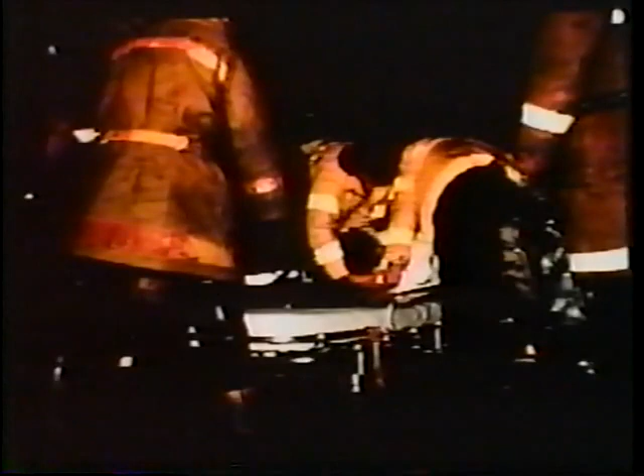Excavation is one of the most hazardous types of work done in the construction industry. Excavation accidents occur frequently and tend to be more serious than construction accidents in general.

The primary type of accident of concern in excavation-related work is a cave-in. The actual number of cave-in accidents is not large when compared to the total number of accidents occurring in all of construction. However, those that do occur tend to be of a very serious nature.

The National Institute of Occupational Safety and Health, NIOSH, conducts research on various safety and health problems, provides technical assistance to OSHA, and recommends standards for OSHA's adoption.

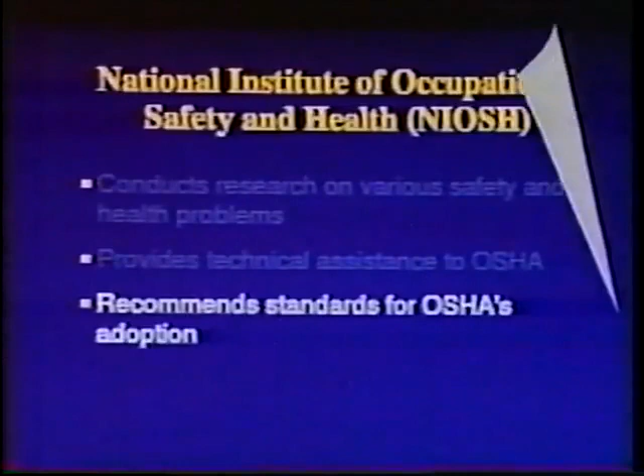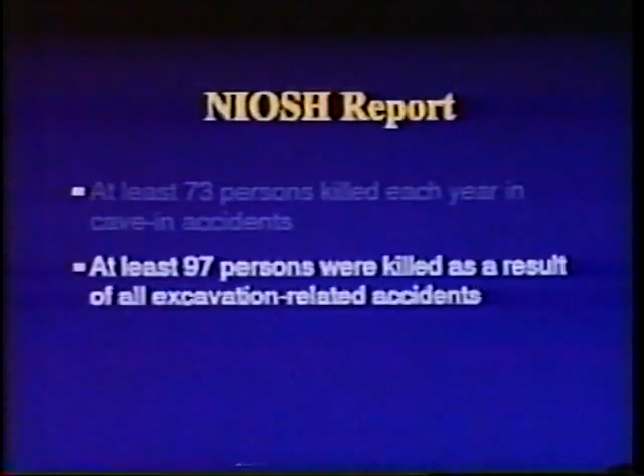In a recent report prepared by NIOSH based on OSHA's inspection data, it was estimated that at least 73 persons were killed each year in cave-in accidents, and at least 97 persons were killed as a result of all excavation-related accidents.

This program presents an overview of OSHA's requirements for protection of employees in excavations.

OSHA's excavation standard is contained in its Code of Federal Regulations for the Construction Industry, 29 CFR, Part 1926. The standards found in Subpart P consist of 3 sections.

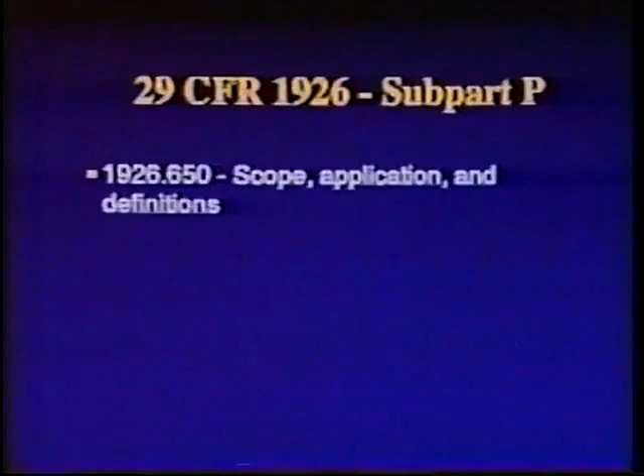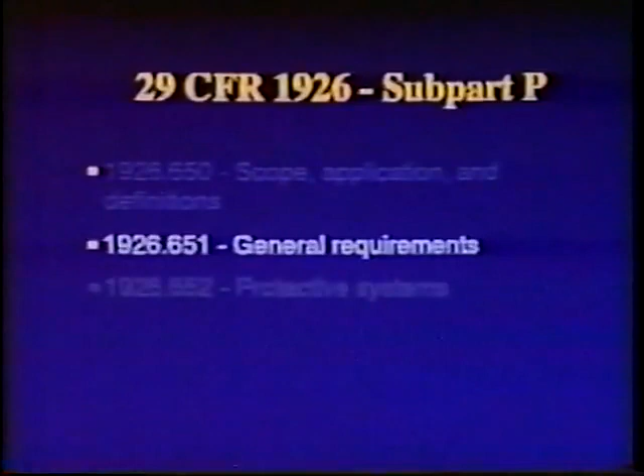Section 1926-650 contains the scope, application, and definitions applicable to Subpart P. Section 1926-651 contains general requirements, and Section 1926-652 contains requirements for protective systems.

There are also 6 appendices, A through F.

OSHA's excavation standard defines excavations to include trenches. The standard states that, in general, the depth of a trench is greater than the width, but the width of the trench, measured at the bottom, is not greater than 15 feet.

OSHA Standard 29 CFR 1926-651 contains requirements for the protection of employees against several different types of hazards of excavation-related work. Let's look at some of these.

All surface encumbrances, such as trees or boulders, that are located so as to create a hazard must be removed or supported to safeguard workers.

The estimated location of utility installations such as sewer, water, fuel, and electric lines, or any other underground installations that may reasonably be met with during excavation work, are to be determined prior to opening the ground.

Prior to start of actual operations, the utility companies or owners are to be advised of the proposed work and asked to establish the underground installation's actual location.

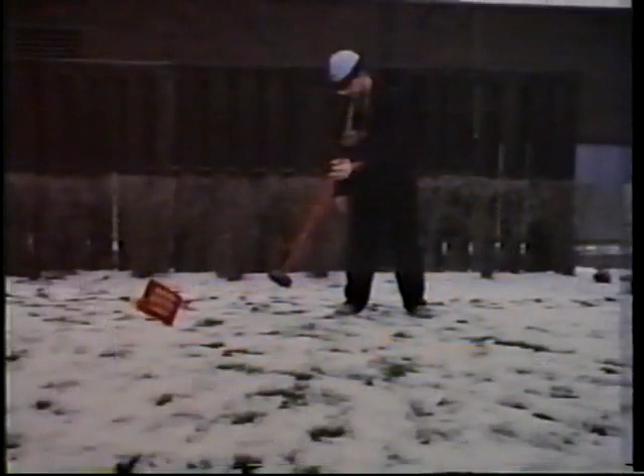When the utility or owner cannot establish exact locations or respond in a timely manner, the contractor may proceed with caution. Detection equipment or other acceptable means to locate utility installations must be used.

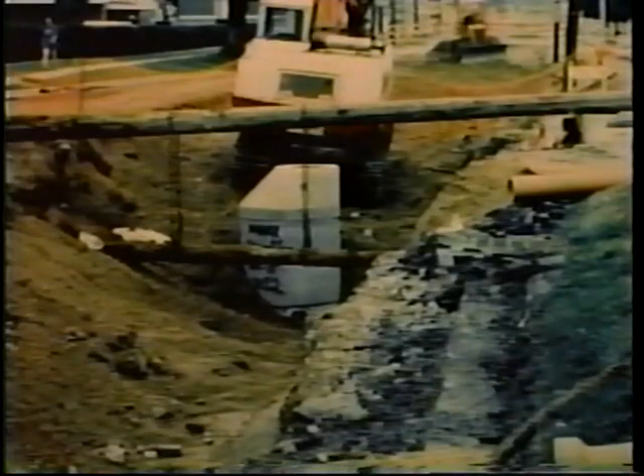When excavation work nears the estimated location of the installations, the exact location is to be found by safe and acceptable means. While the excavation is open, underground installations must be protected, supported, or removed as necessary to safeguard employees.

Flooding, shock, asphyxiation, electrocution, fire, explosion, and collapse of undermined installations are some of the hazards that result when underground installations are damaged.

Structural ramps must be designed and constructed to meet the requirements of their usage.

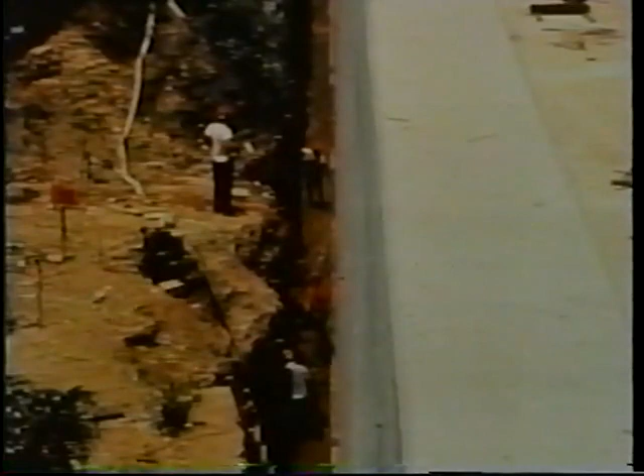Safe means of entering and leaving excavations must be provided for workers. A stairway, ladder, ramp, or other safe means of egress must be located in trench excavations 4 feet or more in depth so as to require no more than 25 feet of lateral travel.

This is to allow workers to get out quickly in the event of an emergency.

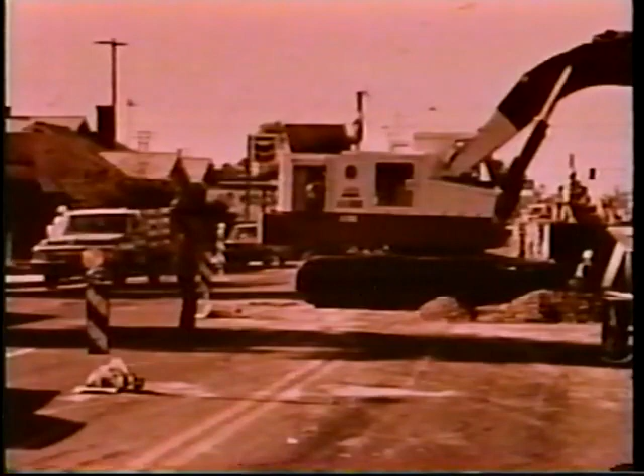Employees exposed to public vehicular traffic shall be provided with and must wear warning vests or other suitable garments marked with or made of reflectorized or high visibility material.

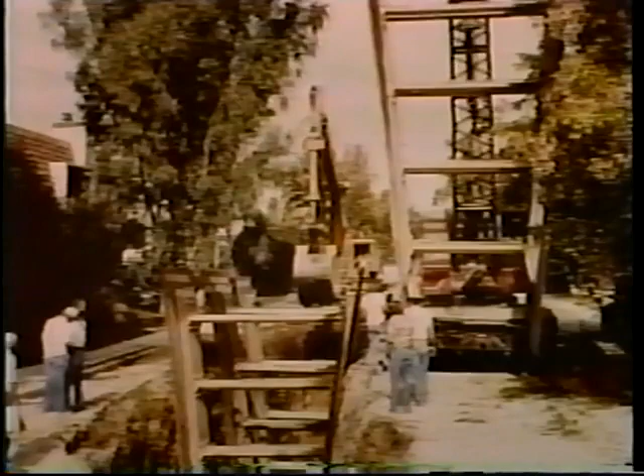Employees are not allowed under loads handled by lifting or digging equipment. Employees must stand away from vehicles being loaded or unloaded to avoid being struck by spillage or falling materials.

Operators may remain in the cabs of vehicles being loaded or unloaded when the vehicles are equipped to provide adequate protection for the operator during these operations.

When mobile equipment is operated next to an excavation or when it must approach the edge of an excavation and the operator does not have a clear, direct view of the edge, a warning system must be used. This system may involve barricades, stop logs, or signals.

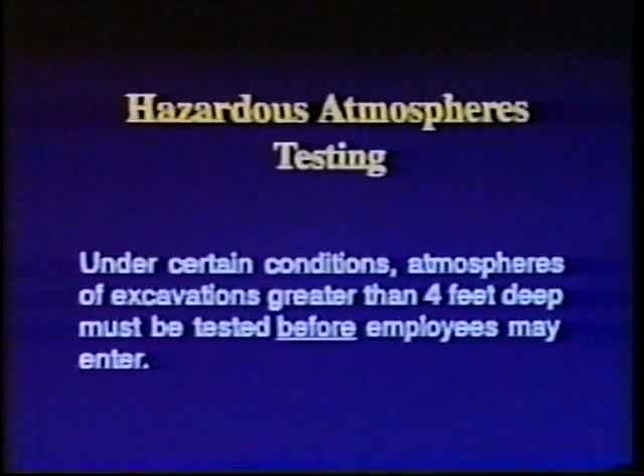To prevent exposure to harmful levels of air contaminants and to assure acceptable atmospheric conditions, certain requirements must be met. Under certain conditions, atmospheres of excavations greater than 4 feet deep must be tested before employees may enter.

Testing is required where oxygen deficiency, that is less than 19.5% oxygen, or a hazardous atmosphere exists or could reasonably be expected to exist.

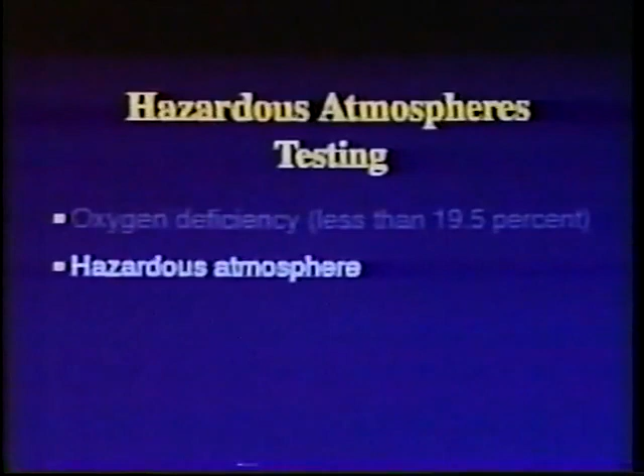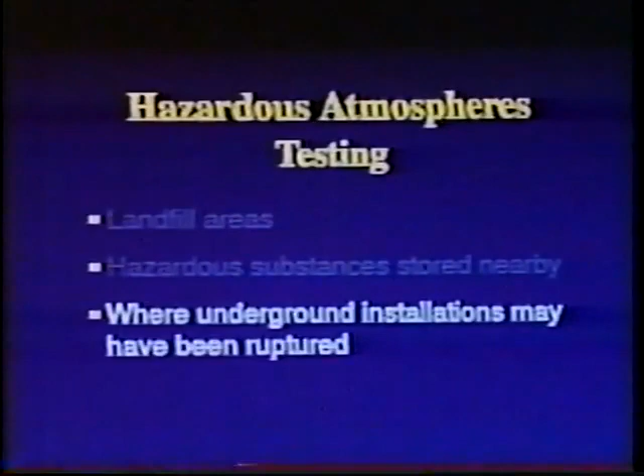Examples of these conditions include excavations in landfill areas or where hazardous substances are stored nearby, or where underground installations may have been ruptured. Adequate precautions shall be taken to prevent employee exposure to atmospheres containing less than 19.5% oxygen and other hazardous atmospheres.

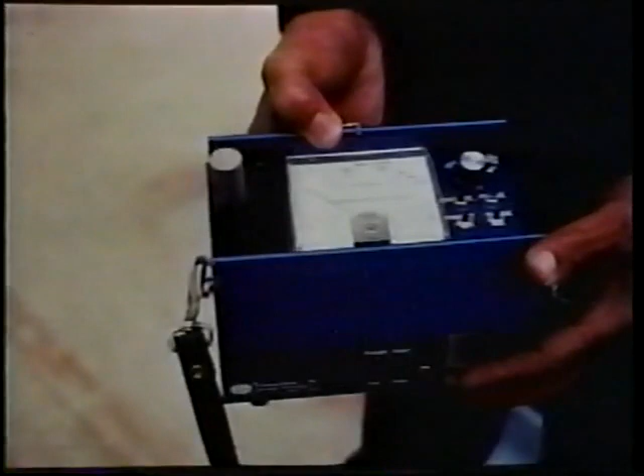These precautions include providing proper respiratory protection or ventilation. When controls such as ventilation are used to reduce the level of atmospheric contaminants to an acceptable level, testing is to be conducted as often as necessary to ensure continuing safety.

Emergency rescue equipment such as breathing apparatus, a safety harness and line, or a basket stretcher must be readily available where hazardous atmospheric conditions exist or can reasonably be expected to develop. This equipment must be attended when in use.

Employees entering deep and confined footing excavations are to wear a harness with a securely attached lifeline. The lifeline is to be separate from any line used to handle materials and is to be individually attended at all times while the employee wearing the lifeline is in the excavation.

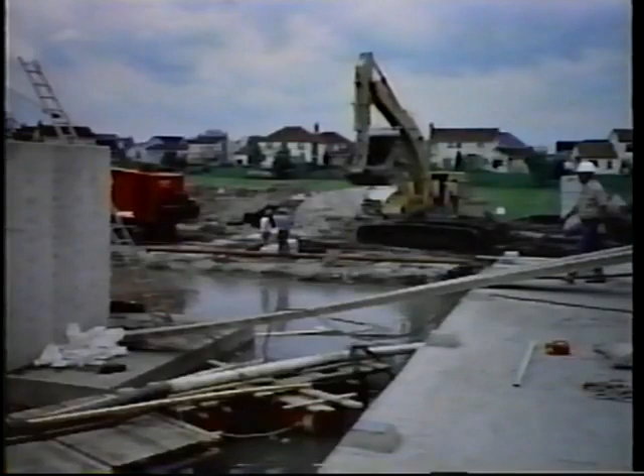Water is very likely to be present during the course of work in many excavations and is one of the major concerns during excavation operations. The action of water against the sides of excavations can cause undermining and cave-ins. The presence of accumulated water in or around excavations must, therefore, be treated with caution.

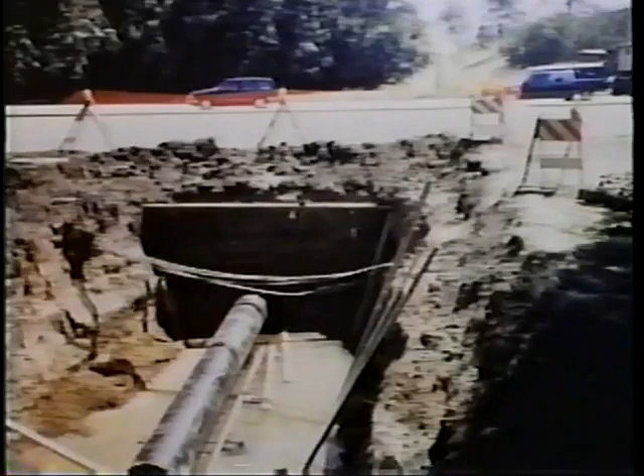Employees shall not be permitted to work in excavations where water has accumulated or is accumulating unless adequate precautions have been taken to protect them. Necessary precautions vary with each situation but could include special support or shield systems or water removal.

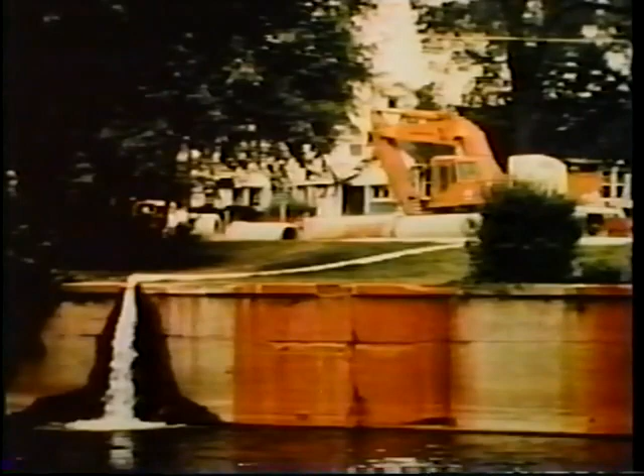If water removal equipment is used, the equipment and its operation must be monitored by a competent person to assure continued proper operation. If excavation work interrupts the natural drainage of surface water, diversion ditches, dikes, or other means must be used to prevent surface water from entering the excavation and to provide safe drainage of the adjacent area.

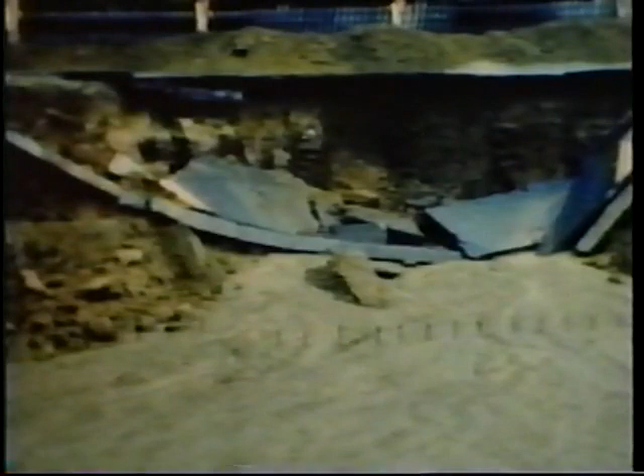Workers may also face hazards where the stability of adjacent buildings, walls, or other structures is endangered by excavation operations. Support systems such as shoring, bracing, or underpinning must be provided to ensure the stability of such structures for the protection of employees. Excavation below the level of the base or footing of any foundation or retaining wall that could be reasonably expected to pose a hazard to employees is not permitted,

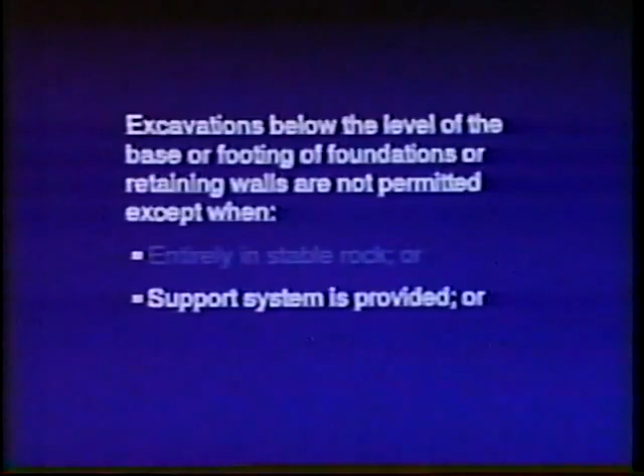except when the excavation is entirely in stable rock, or a support system such as underpinning is provided to ensure employee safety and stability of the structure, or a registered professional engineer, PE, has approved a determination that the structure is far enough away not to be affected by excavation activity, or that such excavation work will not pose a hazard to employees.

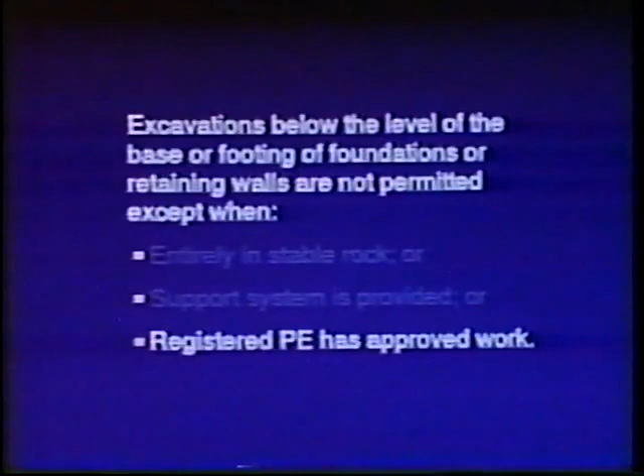Sidewalks, pavements, and appurtenant structure may not be undermined unless a support system or another method of protection is provided to protect employees from possible collapse.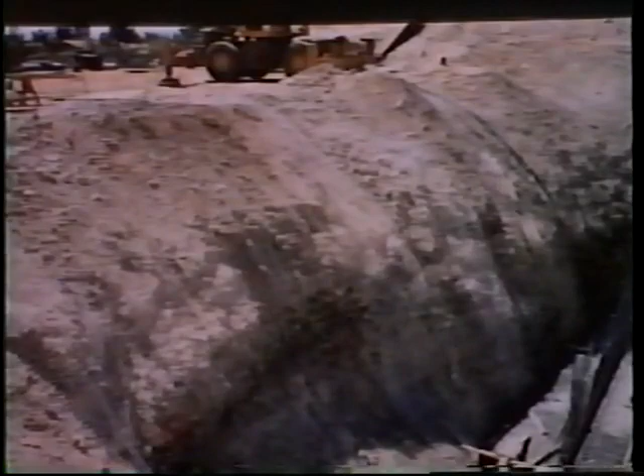Employees must be protected from loose rock or soil which might create a hazard by falling or rolling from the excavation face. Materials and/or machines may become hazardous if measures aren't taken to keep them from sliding or falling into an excavation where employees are working.

Protection of employees from materials or equipment which could fall or roll into an excavation shall be provided by keeping them at least 2 feet from the edge of excavations, or by the use of adequate retaining devices, or by a combination of both if necessary.

Daily inspections of excavations, the adjacent areas, and protective systems must be made by a competent person for evidence of a situation that could result in possible cave-ins, failure of protective systems, hazardous atmospheres, or other hazardous conditions.

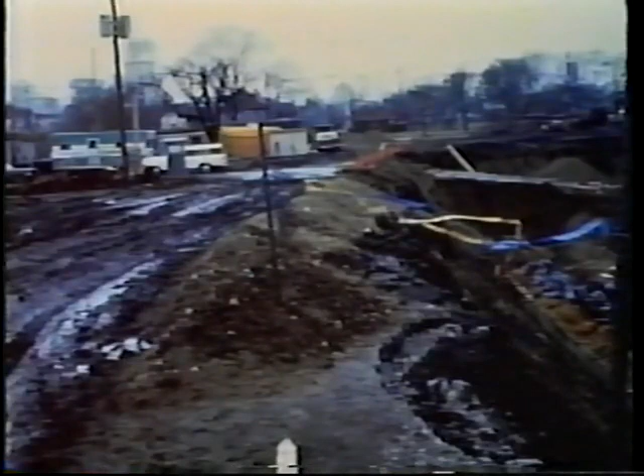Excavations subject to heavy rain runoff are to be inspected by a competent person and, as necessary, precautions instituted to protect against the hazard. Inspection shall be made after every rainstorm or other hazard-increasing occurrence.

The competent person shall make inspections prior to the start of work and as needed throughout the shift, as well as after every rainstorm or other hazard-increasing occurrence. These inspections are only required when employee exposure can be reasonably anticipated.

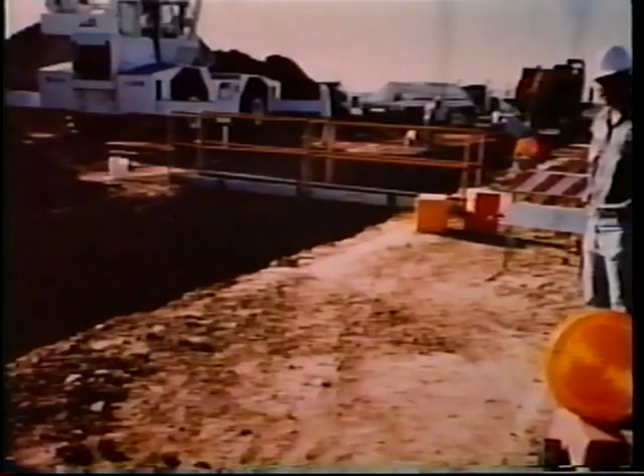Where employees or equipment are required or permitted to cross over excavations, walkways or bridges with standard guardrails must be provided.

Excavation safety requires pre-planning. Let's take a look at some other areas where anticipation of possible hazards can help avoid accidents and injuries. OSHA Standard 29 CFR 1926.652 contains requirements for the protection of employees from cave-ins through the use of protective systems.

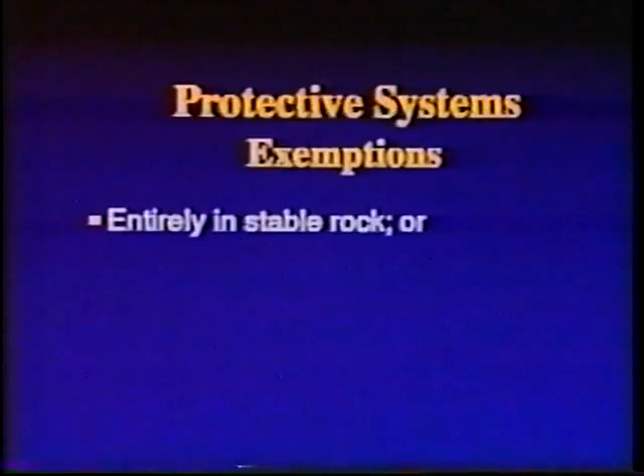OSHA requires that each employee in an excavation be protected from cave-ins by a protective system, except when excavations are made entirely in stable rock, or excavations are less than 5 feet in depth and determined by a competent person to show no indication of potential cave-in.

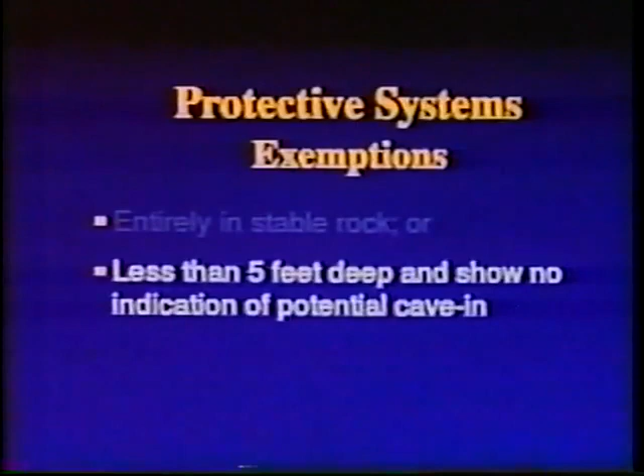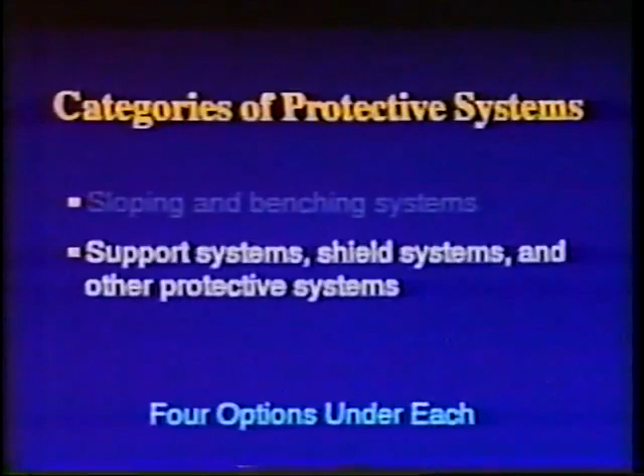OSHA divides protective systems into two categories: sloping and benching systems, and support systems, shield systems, and other protective systems. The use of either of these categories of protective systems requires the choice of one of 4 design options.

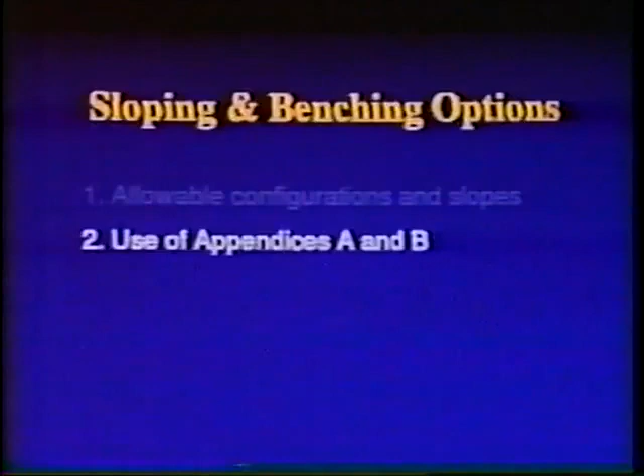Let's first look at the allowable options when choosing sloping and benching systems. The options include allowable configurations and slopes, the use of Appendices A and B, designs using other tabulated data, and designed by a registered professional engineer.

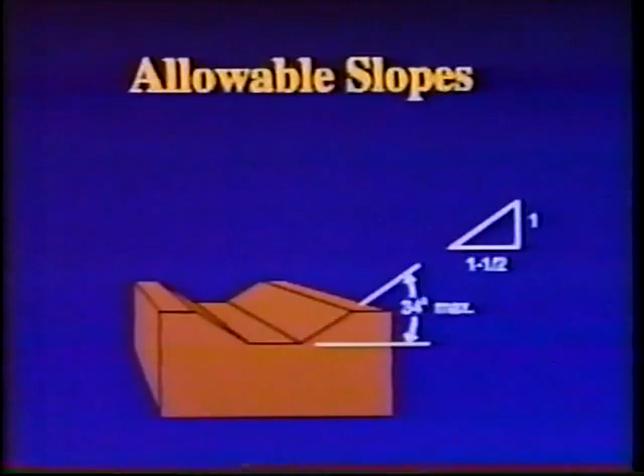The first option specifies allowable configurations and slopes. Any excavation less than 20 feet in depth may be sloped at an angle not steeper than 1 1/2 horizontal to 1 vertical, 34 degrees measured from the horizontal. Such slopes meet OSHA's requirements for worst-case soils, Type C, as defined in 29 CFR 1926, Subpart P, Appendix A.

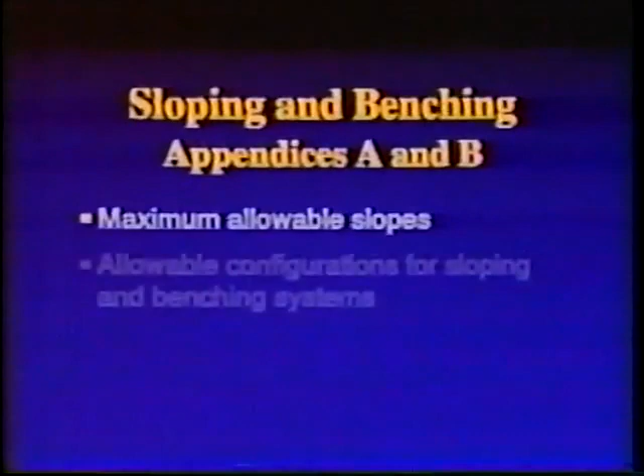The second option involves the use of Appendices A and B. Maximum allowable slopes and allowable configurations for sloping and benching systems are set forth in Appendices A and B.

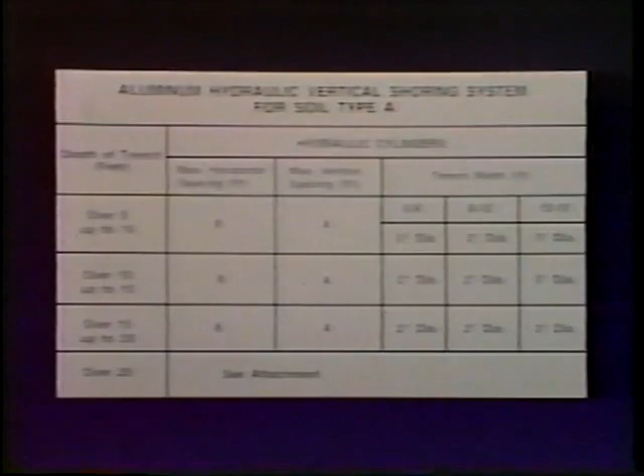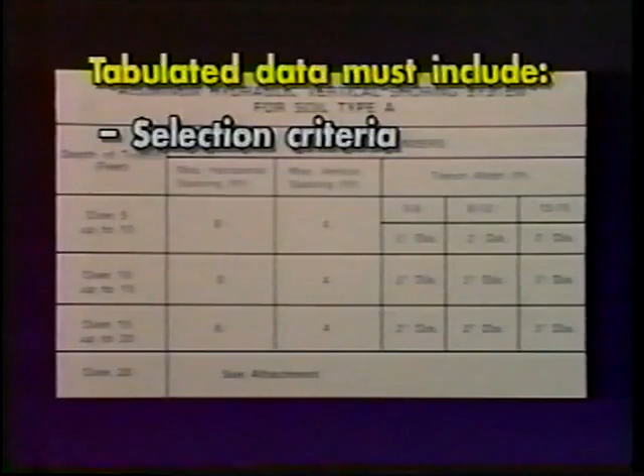The third option, when choosing sloping and benching systems, involves the use of tabulated data, such as tables and charts. The tabulated data must be in written form and include selection criteria, limits on data usage to include the magnitude and configuration of slopes determined to be safe, explanatory information necessary to aid the user to make correct selection of protective systems, and the identity of the registered PE who approved the data.

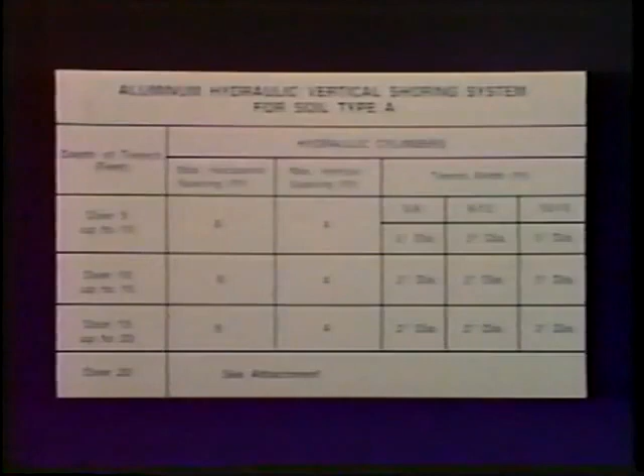At least one copy of this data must be kept at the job site during construction of the protective system.

The fourth option involves the design by a registered professional engineer. Designs must be in written form and must include the magnitudes and configurations of slopes and benches determined to be safe for the project, as well as the identity of the approving PE.

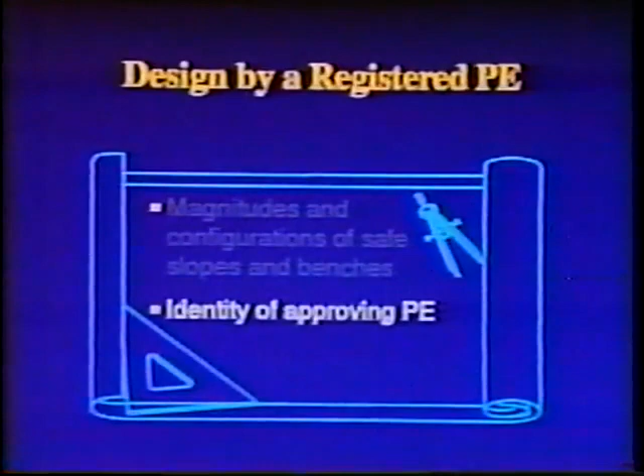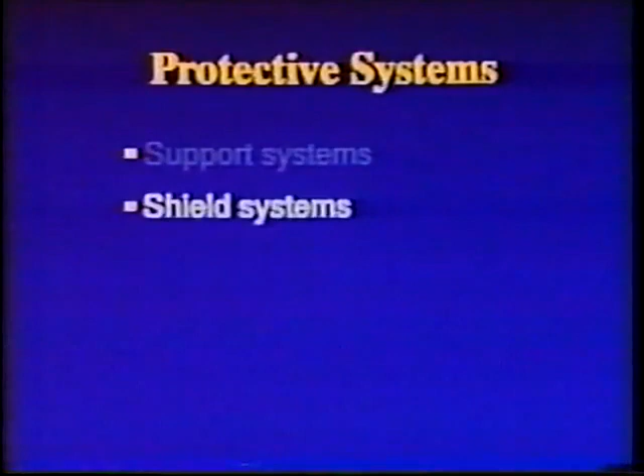The second category of protective system prescribed by OSHA to protect employees from cave-ins involves the use of support systems, shield systems, and other protective systems. The use of this category also requires the choice of one of 4 design options.

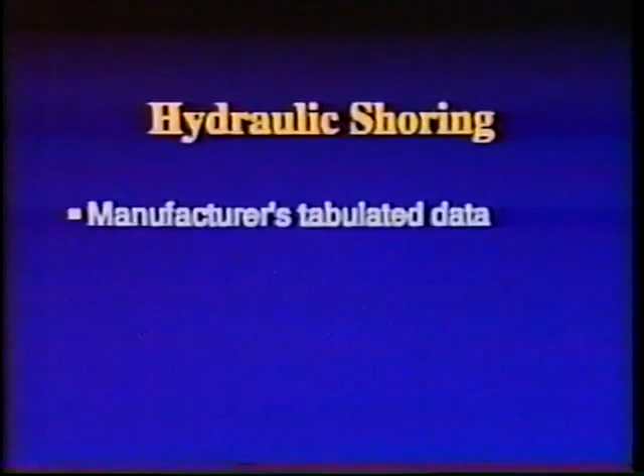The first option is to use Appendices A and C or D. For timber shoring and trenches, Appendix A, soil classification, and Appendix C, timber shoring, are to be used. Hydraulic shoring of trenches calls for use of either Option 2, manufacturer's tabulated data, or Appendix D, aluminum hydraulic shoring. Appendix D is to be used when manufacturer's tabulated data are not available.

The second option is to use manufacturer's tabulated data. Design of support, shield, or other protective systems using these data must agree with all specifications, recommendations, and the limitations issued or made by the manufacturer.

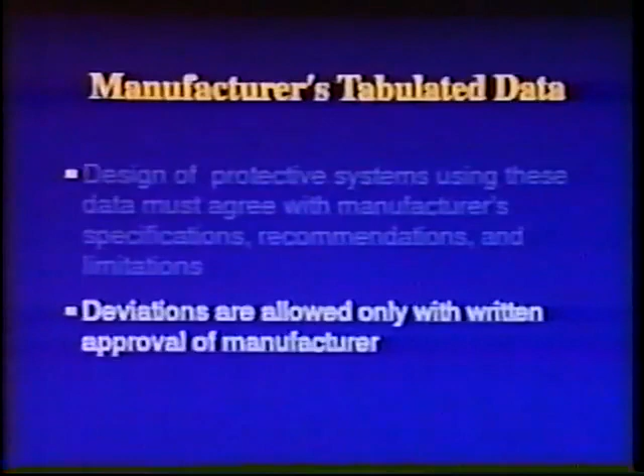Deviations are allowed only with the manufacturer's specific written approval. These data are to be in written form and kept at the job site during construction of the protective system.

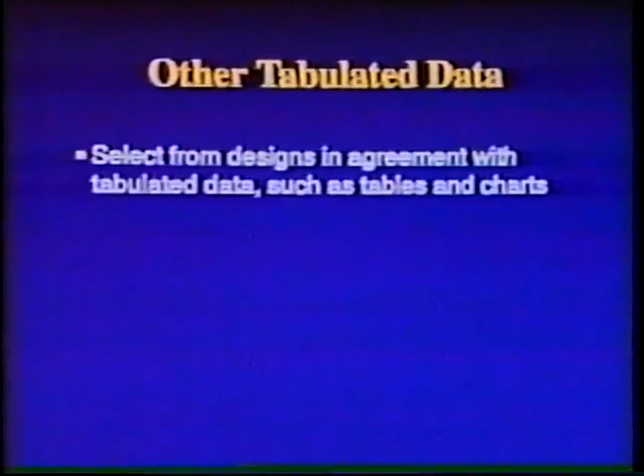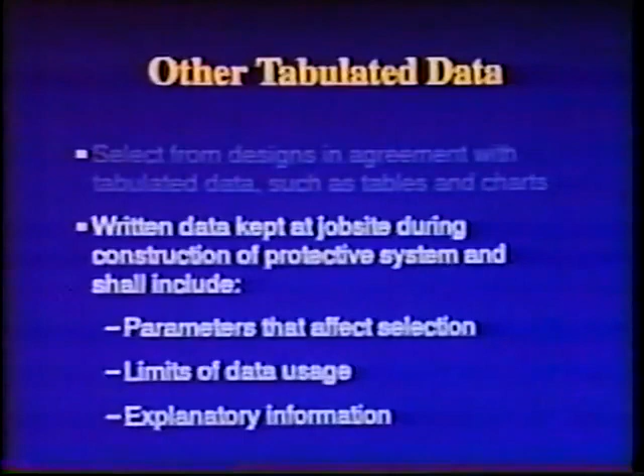The third option when choosing the use of support, shield, or other protective systems is design using other tabulated data. The contractor may select from designs in agreement with tabulated data, such as tables and charts, approved by a registered professional engineer. The written data are to be kept at the job site during construction of the protective system and shall include the parameters that affect system selection, the limits of data usage, and any explanatory information necessary to make the correct system selection. The fourth option is to use a design approved by a registered professional engineer.

Such designs are to be written, kept at the job site during construction of the protective system, and include a plan indicating the size, types, and configuration of the materials to be used, and the identity of the approving registered PE.

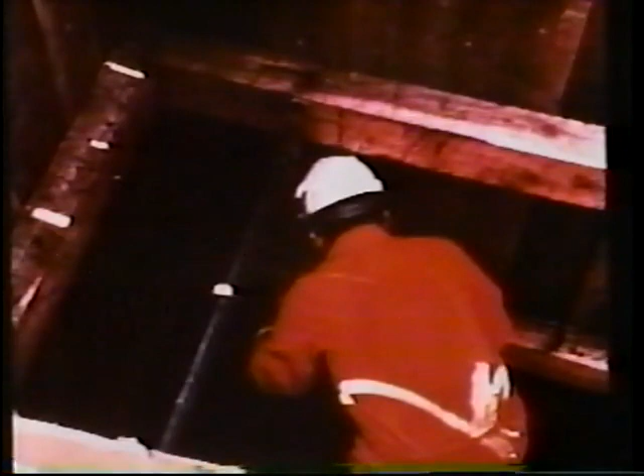Materials and equipment used for protective systems must be free from damage or defects that might impair their proper function. A competent person shall examine damaged material or equipment to evaluate its suitability for continued use. Material or equipment found unsafe for continued use shall be removed from service.

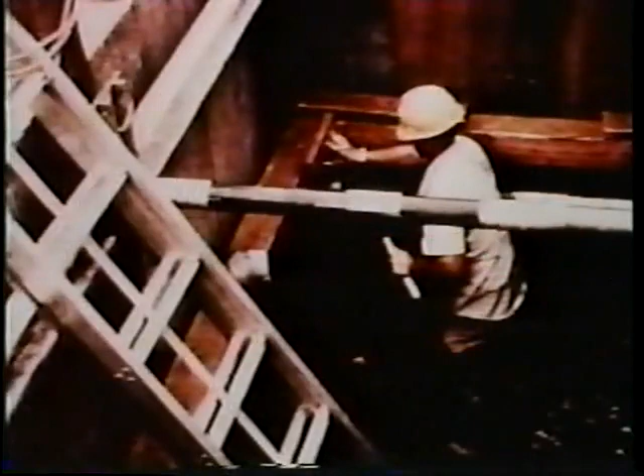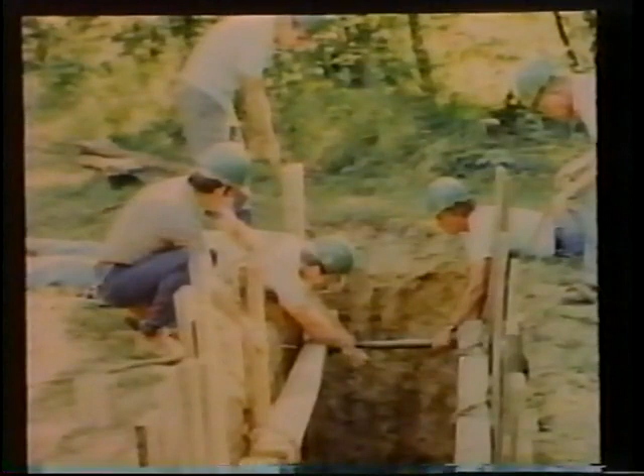Members of support systems are to be securely connected to prevent sliding, falling, kickouts, or other predictable failures. Support systems must be installed and removed in a way which protects employees from cave-ins, structural collapses, or from being struck by system members.

Installation should begin at the top and progress to the bottom of the excavation. Removal reverses this process. Installation of support systems is to be closely coordinated with the excavation of trenches. Backfilling shall progress together with the removal of support systems.

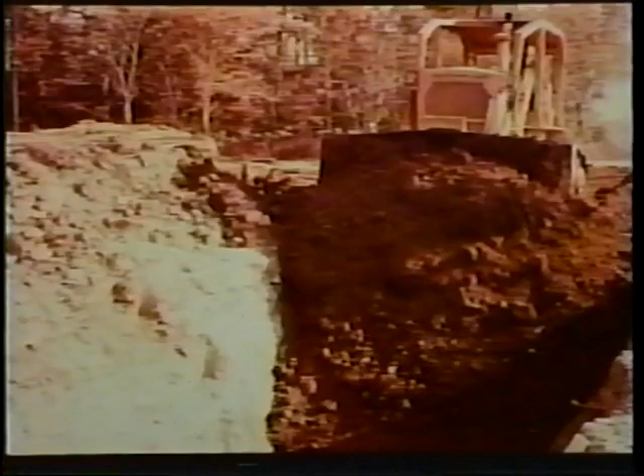Material may be dug to a level no more than 2 feet below the bottom members of a support system if the system is designed to resist the forces calculated to the full depth of the trench, and there is no indication of soil loss from behind or below the bottom of the support system. This allowance for 2 free feet also applies to trench shields.

Employees may not work on the faces of slopes or benches above other workers unless the workers at the lower level are protected from the hazard of falling, rolling, or sliding material or equipment.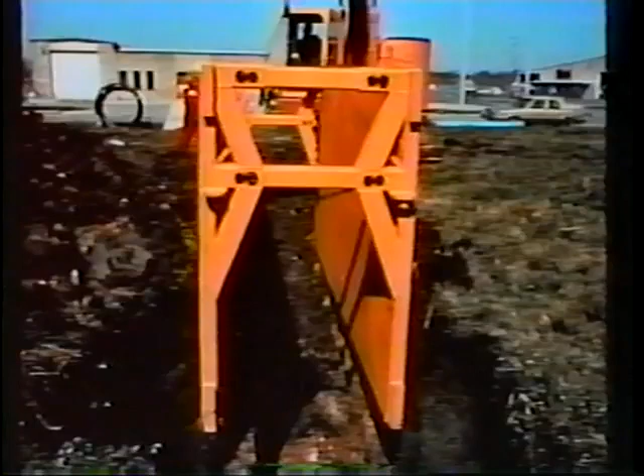Shields shall be installed in a way that will restrict lateral or other hazardous movement of the shield in the event of sudden lateral pressures. Employees are not to be in shields when they are being installed, removed, or moved vertically. Employees may remain inside shields being moved horizontally.

Employees are also to be protected from the hazards of cave-ins when they're entering or leaving the areas protected by the shield. Contractors who choose to use the appendices of OSHA's excavation standard in design and construction of a protective system must thereafter treat the provisions of the selected appendices as mandatory.

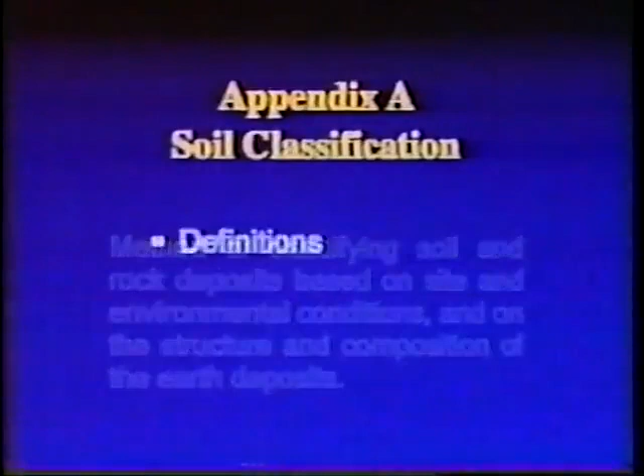Appendix A describes a method of classifying soil and rock deposits based on site and environmental conditions and on the structure and composition of the earth deposits. The appendix contains definitions, sets forth requirements, and describes acceptable visual and manual tests for use in classifying soils.

This appendix applies when a sloping or benching system designed in accordance with the requirements of 1926.652(b)(2) is chosen, when timber shoring for excavations is designed in accordance with Appendix C of Subpart P, or when aluminum hydraulic shoring is designed in accordance with Appendix D.

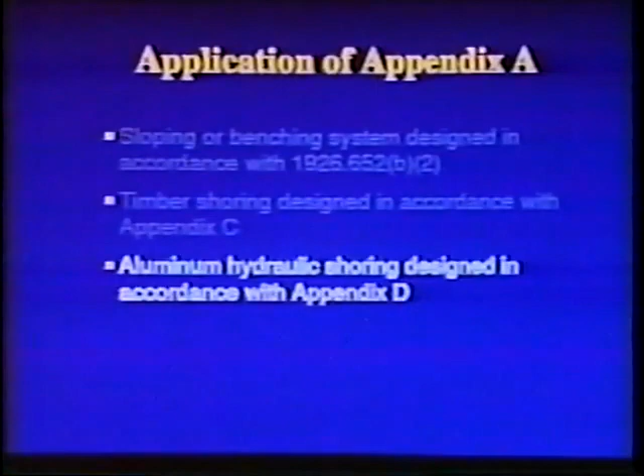Appendix A also applies if other protective systems are designed and selected for use from data prepared in accordance with requirements set forth in 1926.652(c), and the use of the data is based on use of the soil classification system presented in Appendix A.

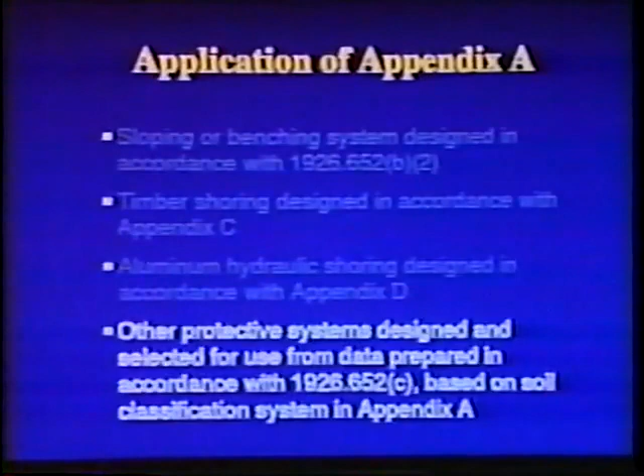To restate, use of Appendix B, sloping and benching, Appendix C, timber shoring for trenches, or Appendix D, aluminum hydraulic shoring for trenches, all require the use of Appendix A, soil classification. Indeed, any protective system based on the use of the soil classification system presented in Appendix A must meet all the requirements of that appendix.

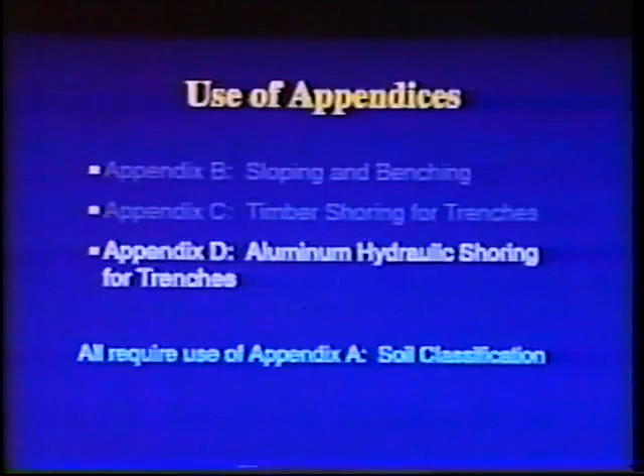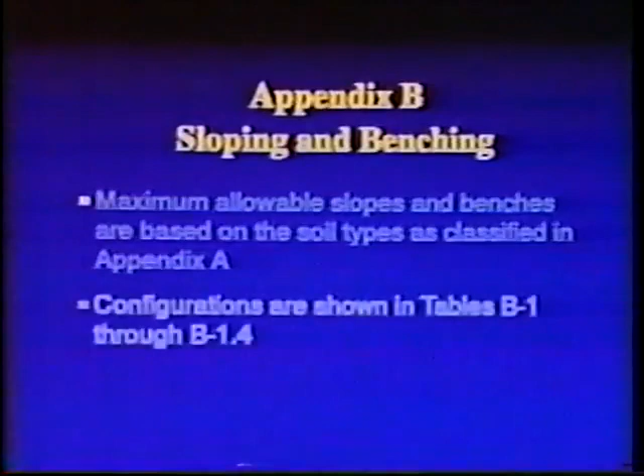Appendix B contains specifications for sloping and benching when used to protect employees from cave-ins. Maximum allowable slopes and benches are based on the soil types as classified in Appendix A and are found in tables B-1 through B-1.4.

Appendix C contains information to be used when timber shoring is provided as a method of protection from cave-ins in trenches not more than 20 feet deep. Selection of required timber dimensions and placement may be found in tables C-1.1 through C-2.3. Each table presents the minimum sizes of timber members to use in a shoring system.

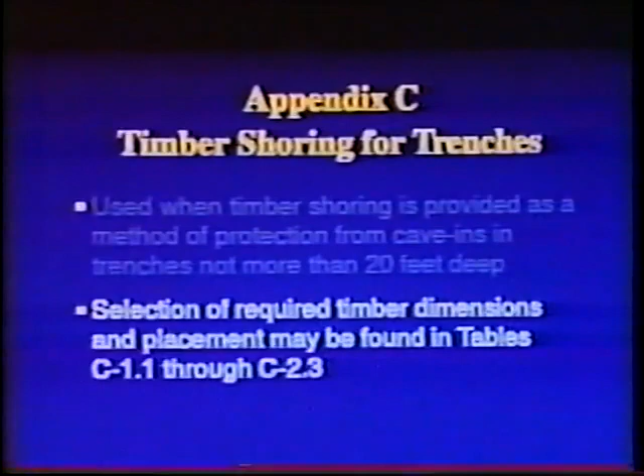Tables C11 through C13 are for actual size. Tables C21 through C23 are for nominal size.

Appendix D sets forth requirements for aluminum hydraulic shoring in trenches less than 20 feet deep. This appendix must be used when manufacturers' tabulated data are not available. Required sizes and placement of hydraulic shoring are given in tables D11 through D14.

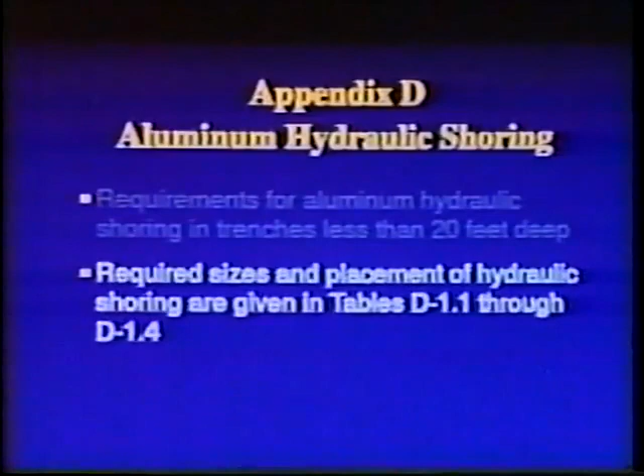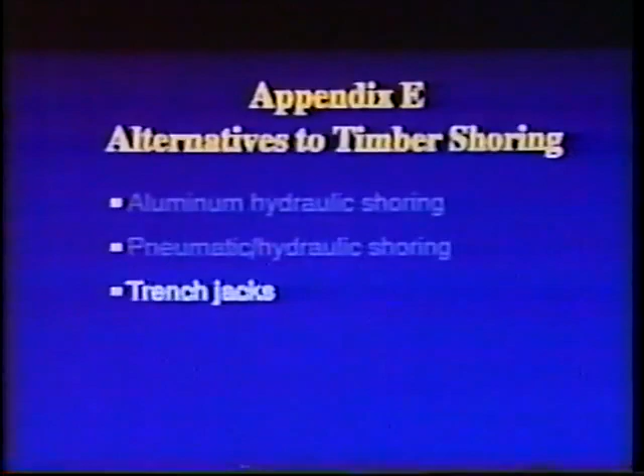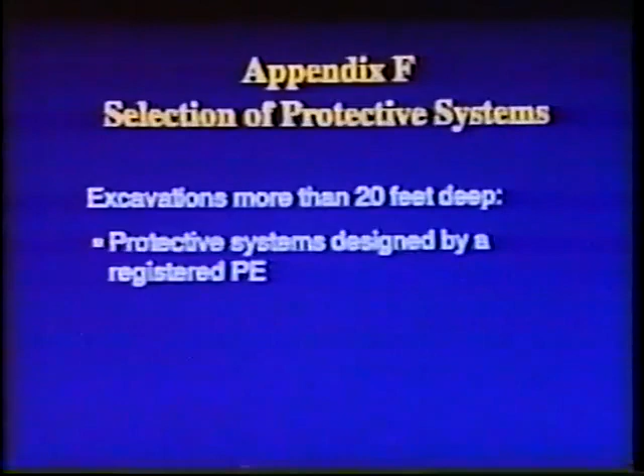Appendix E illustrates alternatives to timber shoring such as aluminum hydraulic shoring, pneumatic hydraulic shoring, trench jacks, and trench shields. Appendix F presents a graphic summary of the requirements and options in Subpart P for excavations 20 feet or less in depth. Deeper excavations require protective systems designed by a registered professional engineer or manufactured systems capable of the needed depth and used in accordance with manufacturer specifications.

This program has presented an overview of OSHA's requirements for protection of employees in excavations. Strict adherence to these regulations can substantially reduce the number and severity of accidents resulting from excavation work.